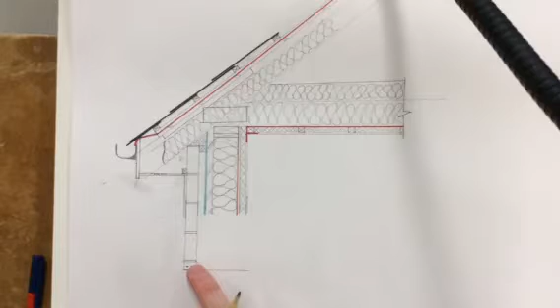Alright, so what we'll do is we will bring a line straight across from here. So this is going to be the bottom of that. So if we just bring down the outside of the timber frame. We'll bring everything down in a second. There is a 50mm cavity closer, and then there is 50mm of insulation going across here until it reaches the sheeting material. So I'm going to bring down the sheeting material first, and then I'm going to measure up 50,

bring that across, and then bring down the outside of the wood fibre board. That gives me where my cavity closer is there. Alright, so that's in position there, and then we have our normal rigid insulation going right the way across here. So that runs over to the sheeting material, and then we'll have our timber supports then on top

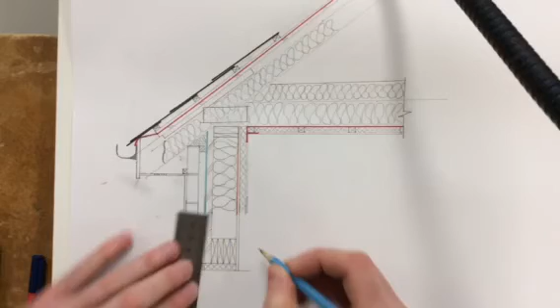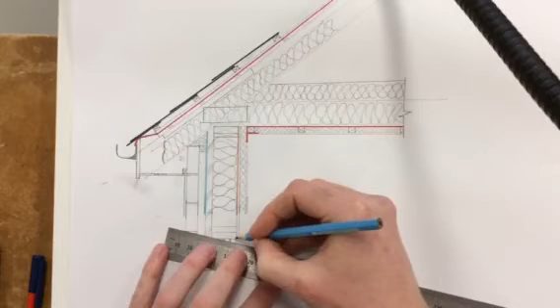Okay, so there the timber's put up on its edge to give greater support. Then we have a top rail, and then we have a head plate that goes on top of that. So another 5 and 5, except this time they are going across the stud frame, very similar to the top up there. There's an awful lot of timber there, but there has to be to support the opening of the window, because there's such an amount of weight on top of this.

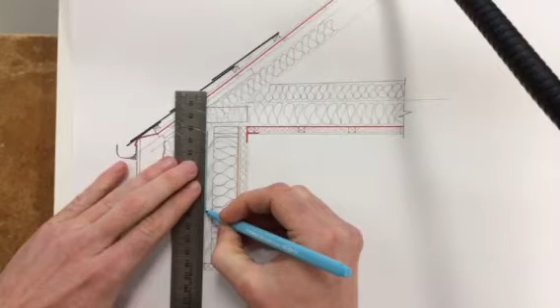Alright, so then we can bring down the quilted insulation and finish that off. Okay, so we have an awful lot of this detail done now. I'm just going to bring down the breather membrane so it carries on down the full length of that wood fibre board, and then it should go inside of that cavity closer. It's going to come up blue there now. So it should come down the whole way there.

Then we have to bring down our service cavity. Bring that down there. Right, and I'm just going to carry on my insulation coming down through that service cavity.

Alright, so now we have our opening done up here, and then we are in a position to add in the window frame. In most drawings they're going to give you an overall size for this window frame, and it's going to be positioned. Usually you'd have your windowsill down underneath, and you would just bring up your lines, bring up your frame accordingly to that. Here we're just going to position it just at the start of this cavity closer here.

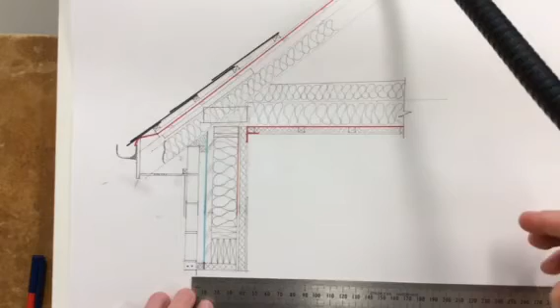Usually they say what size they want the frame to be. In most cases it's around 150 by 150. That just has to fit into, and then the actual shape that it takes doesn't make too much odds outside of that. So I wouldn't get too bogged down on it.

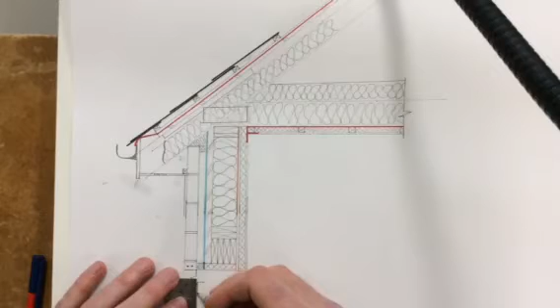And I always get into the habit now of putting in triple glazing unless it states otherwise in a question. Alright, so there's one panel. There's two. And there's three.

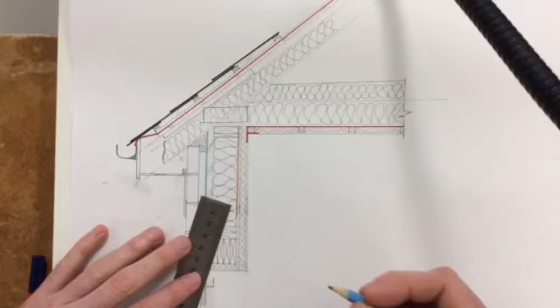Right, so then the other thing it'll ask you for in the question is a thermally broken window frame. The window's going to be made up of different sections, so we will try and have insulation going right the way around through it, which is what I'm doing here. Almost like a rigid insulation up here. So then you have your 3 panes of glass.

What do we need to finish off? On our timber frame we have our plaster slab coming down here and our skim finish. That's going to have to go in to meet the window frame, obviously to seal that. Then you would have an air tightness tape put onto that. The air tightness tape would be wrapped around, trying to seal all the joints really. So that comes down there. You wouldn't be able to see it inside.

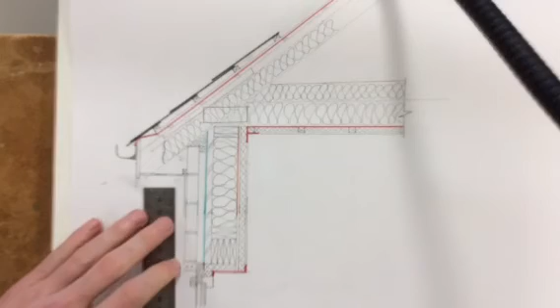And then on the outside we have our plaster that's come down here. We have then what's called a reveal. It just protrudes out ever so slightly. It will be put on first before this plaster is put on. It's kind of put on separately, and it just seals off the window frame as well. So that would be adding on a top of a window detail onto an eaves detail. It is a combination style drawing, so it's just something to watch out for.

What else can we put in when we are at it? So we could put in an anchor strap there, come across, have it rising up, and then it might be nailed on to the wood fibre board. So that's an anchor strap there.

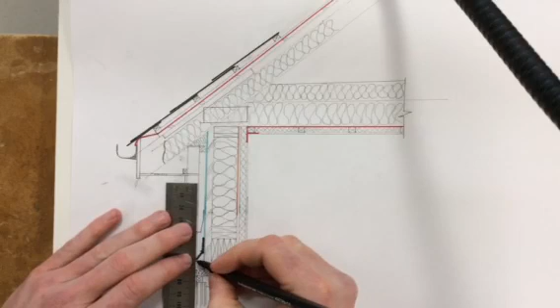Then we could look at DPC as well. We would want to make sure to have step DPC, make sure there's no moisture getting in. So come down here, again down at an angle so it runs away. Comes down here and just outside of that window frame. It's going to be blotchy there now on me, apologies. So it just comes down there and just down the inside of the frame.

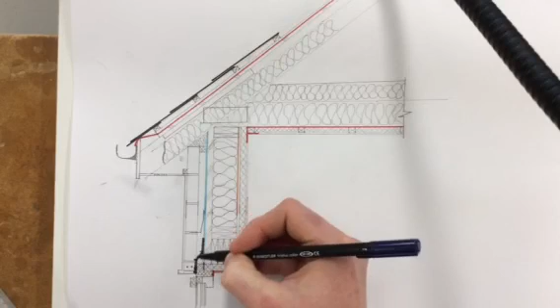So if any moisture does get in here, it comes down. And the wall tie is only real narrow, it's not a sheet, whereas this DPC is a sheet and it'll take the moisture away from the window. Alright, so that's just an extra little bit of detail for that drawing.